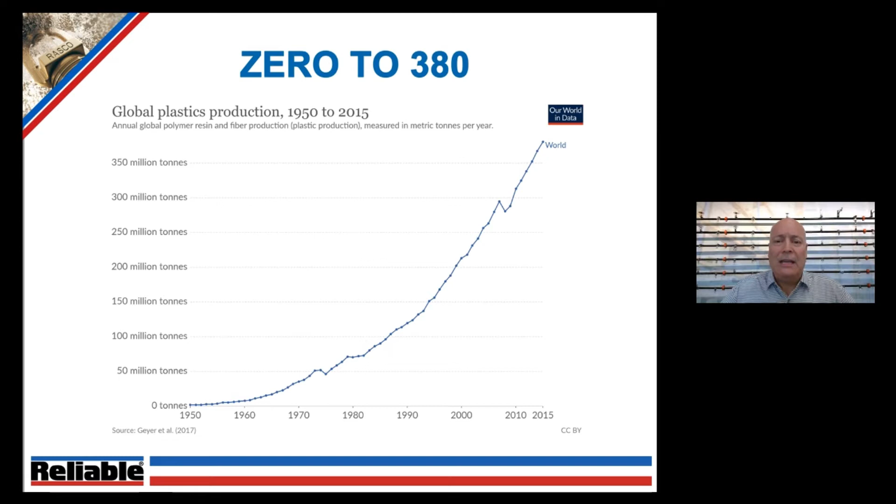The first synthetic plastics were developed as early as 1907, called Bakelite. But it wasn't until 1950 or so when we really saw plastics take off in the world. You can see on the chart here, 0 to 380 million metric tons of plastic between 1950 and modern day. To put that in perspective, if you took two-thirds of the world's population and put them on a scale, you would have roughly 380 million metric tons. So the prominence of plastics in the world today, as everyone knows, is going to be driving a lot of our discussion moving forward.

Up until recently, there's been something missing in the standards. We've had protection schemes for class 1 through 4 and Group A plastics for a number of years, going all the way back to the NFPA 231 and 231C days. Those documents were blended in with NFPA 13 in 1999. There had been protection schemes for Group A plastics with some exceptions, that exception primarily being the protection of exposed expanded plastics.

We did have protection schemes for small limited heights, 5-foot heights, found in the miscellaneous storage section. But the full-on storage of exposed expanded plastics has been missing.

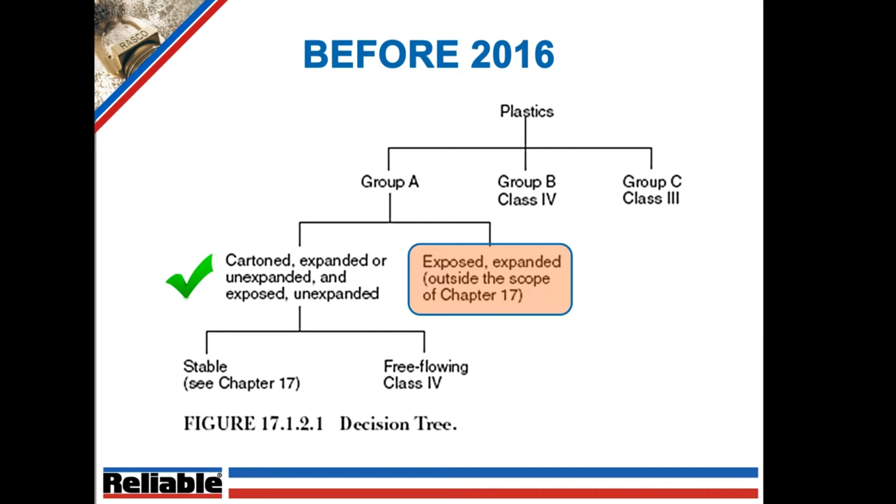Before 2016, this is what the decision tree looked like. You worked your way down, and as you can see there on the left with the green check mark, cartoned expanded or unexpanded and exposed unexpanded - we had protection schemes in NFPA 13, but we did not have protection schemes for the high piled storage of exposed expanded. Those were simply outside the scope.

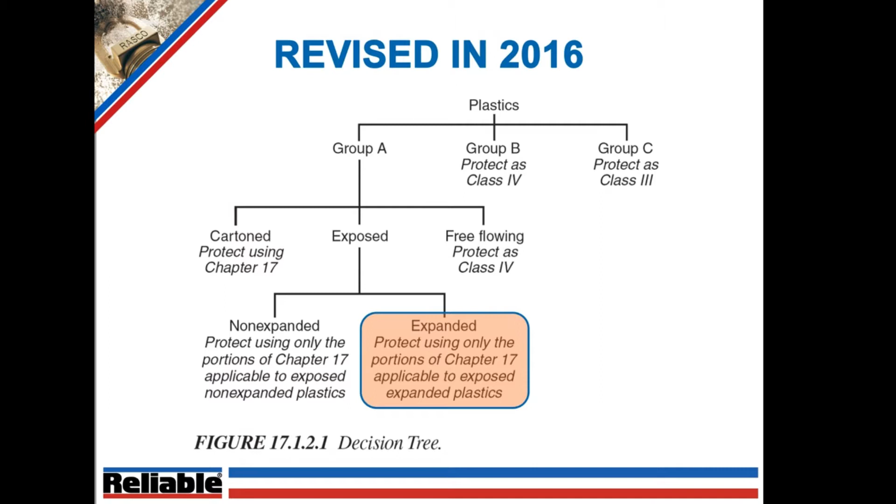In the 2016 edition, however, we did get some direction, and that direction now shows up on the decision tree: expanded plastics protect only using the portions of Chapter 17 applicable to the exposed expanded plastics. What exactly was that? That was an effort undertaken by the Fire Protection Research Foundation, the research wing of NFPA. They essentially did some testing and validated a scheme that would allow the protection of exposed expanded plastics over 25 feet, as well as obviously under 25 feet.

The test parameters were 35-foot storage in a 40-foot building, 8-foot aisles. The interesting aspect of the scheme was the use of vertical barriers. The vertical barrier was installed at every other rack upright, about 16 feet apart. There were some constraints put on the area, 124 square feet, K25 sprinklers at the roof, 12 sprinklers at 60 psi - so large bore sprinklers flowing at high pressure.

Again, remember this is ceiling only. The idea here was to create essentially a chimney to take the heat from the fire directly to the roof as quickly as possible, activate those fire sprinklers as quick as possible, and then force that fire back down in that same chimney or chute, if you will. 12 sprinklers at 60 psi, however, 2,600 gallons per minute. So yes, do we have something that's feasible? We do. Do we have something that uses a lot of water and large piping and fire pumps and things like that? Absolutely. So that was one option that came in 2016 in Chapter 17.

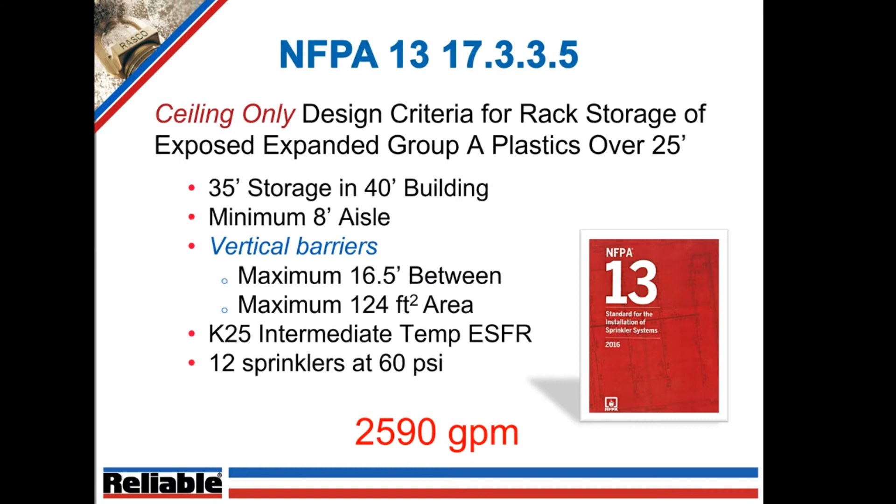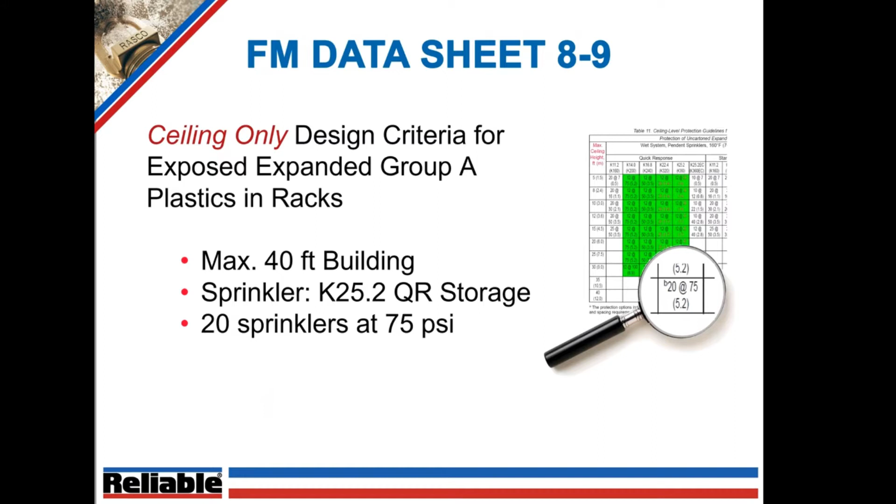Factory Mutual data sheet 8-9 also has a ceiling-only design criteria for exposed expanded plastics. Again, 40-foot high building, K25 storage sprinklers, quick response storage sprinklers, an expanded area of 20 sprinklers flowing at 75 psi. No barriers, which would explain the expanded area, and again higher pressure by 15 psi. Do the math on that one, you're going to end up almost 5,000 gallons per minute.

So again, feasible, large pumps, large storage tanks if you have them, and large piping to go along with it.

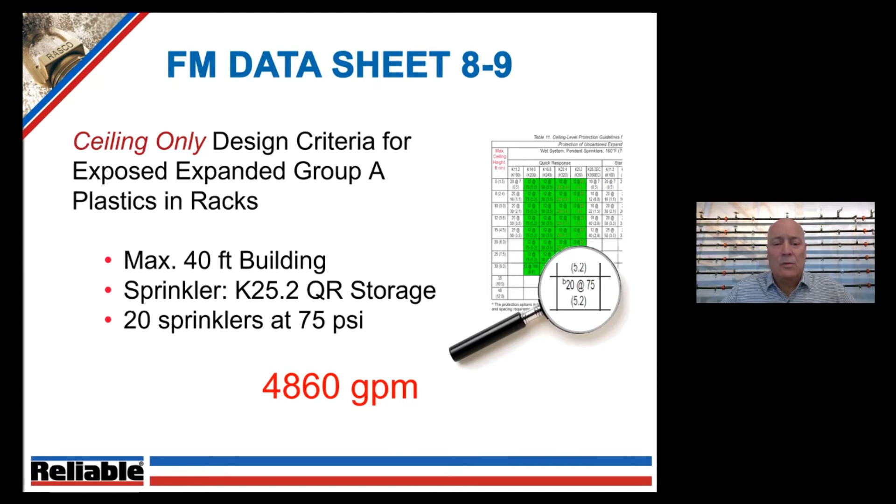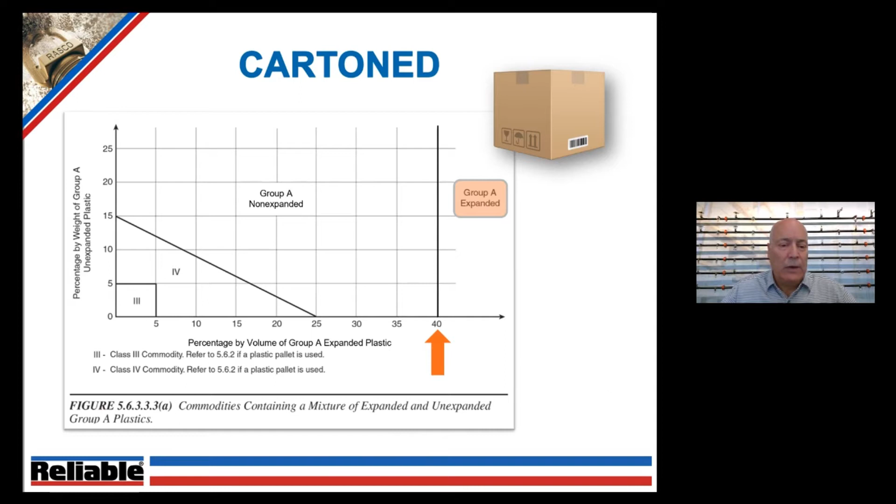What we're going to do is take a look at the percentage of exposed expanded plastics by volume, and draw a line at the 40% mark. If it's more than 40%, we protect that as a Group A expanded plastic. To the left of the 40% mark, we work our way down into a Group A non-expanded protection scheme, and then depending on weight and volume, down into Class 4 and even Class 3 for small amounts of each of those components.

If the commodity is not cartoned and is on the racks exposed, that 40% mark drops down to 25%. We're then going to have a protection scheme that protects the entire area as a Group A expanded plastic exposed. And again, less than that, we work our way down to the Group A non-expanded exposed, and then Class 4, Class 3 as you work your way down.

So again, some guidance provided in 2016 on how to do some of these protection schemes.

Also, what we got in 2016 was a protection scheme for isolated commodities—I've used a real technical term there, localized stuff in racks. This is for a higher class commodity in limited amounts that can be isolated to a section or portion of the rack. These protection schemes will involve either an extended coverage area beyond the square footage of the protected commodity, or vertical barriers and perhaps a horizontal barrier with sprinklers enclosed within those.

We saw some things like this in the big box stores with the storage of paints and paint thinners in local hardware stores. We still see things like this happening, but now it's been standardized in NFPA 13.

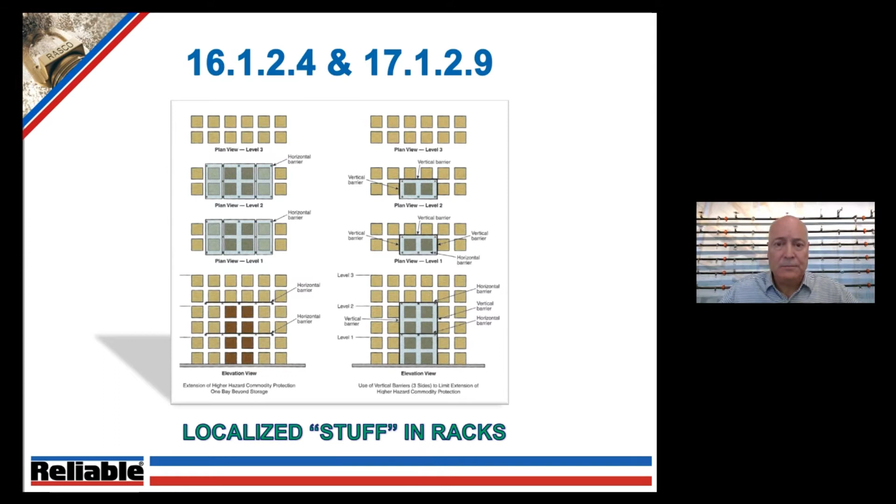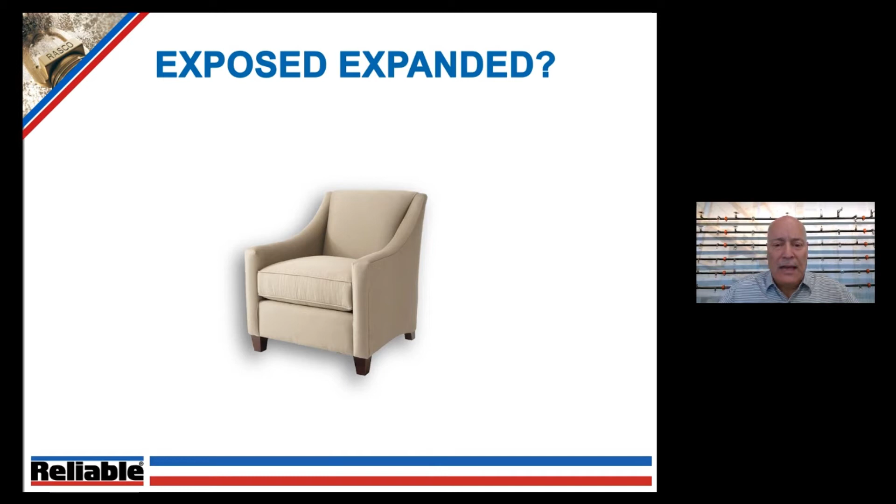So we worry about exposed expanded plastics. What actually are those? We need to be careful here. You can look at the chair on the screen and definitely understand that's some type of exposed expanded plastic within that chair. However, there are other things that we don't necessarily look at and recognize as an exposed expanded plastic.

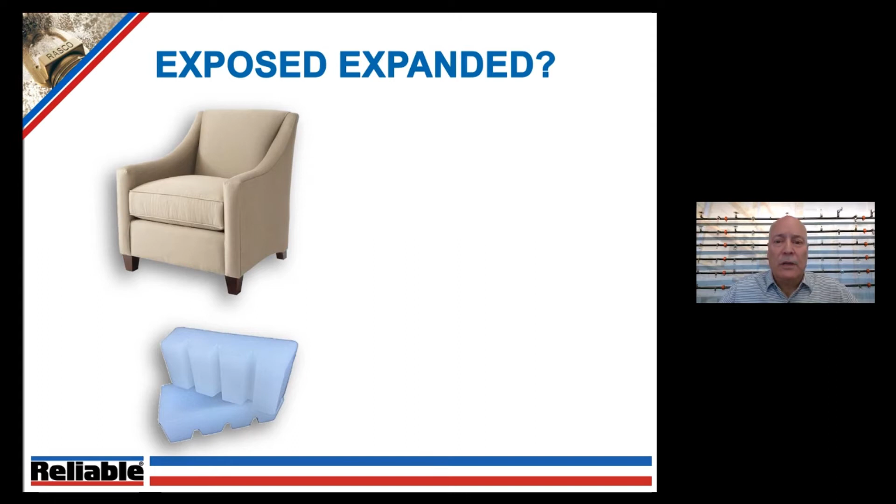Paraffin blocks are an example of exposed expanded plastics. It's not squishy, you're not going to put your hands on it and squeeze it, but the characteristics of how it burns are similar to those of an exposed chair that you see there.

Car bumpers: the hard plastic on the front of these is definitely not exposed, but what's right behind there is going to be fairly substantial amounts of almost like a dense styrofoam material that creates that shock absorption capability. So that blend of commodities, when you set that on a rack, needs to be treated as an exposed expanded plastic for that reason.

And then finally, charcoal briquettes that are impregnated with lighter fluid. Charcoal briquettes by themselves are going to be a little bit less of a hazard. However, when you impregnate them and they catch fire, they're going to burn similarly to the exposed expanded chair that you see there as well.

So it's very important, as always, to make sure the commodity is classified properly, hopefully by the owner and/or the insurance company. Make sure everyone's in agreement on exactly what we are protecting, and we need to move forward from there.

A question we've used in some of our presentations over the years: we've spent the last 30 years trying to eliminate in-rack sprinklers. We all know the pitfalls of having sprinklers in racks. Since the early 80s, mid-1980s, with the advent of originally large drop sprinklers and then ESFR sprinklers, the whole thrust was to somehow get rid of the in-rack sprinklers to prevent water damage. So we spent the last 30 years trying to do that.

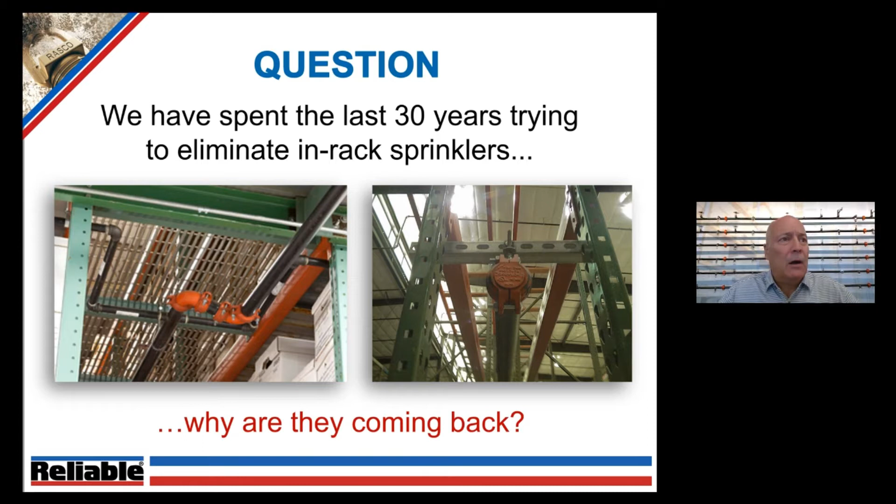Why are they coming back? We talked a little bit about it, right—the advent and the more higher prominence of plastics being stored in our warehouses.

Another feature there is higher buildings and automated storage and retrieval systems. With higher buildings, obviously there's more fuel load as you move vertically, more time for the fire to reach the ceiling, and then the challenge of trying to push the energy of that fire back down to control it.

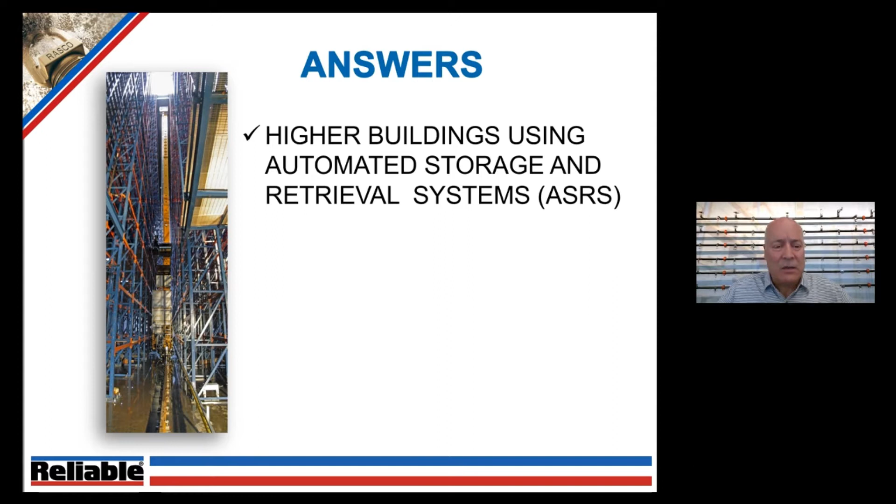The other thing that happens with automated storage and retrieval systems is the computer's ability to find an empty pallet position for any commodity it needs to place. Back in the day, you would isolate your worst commodity to a designated section of racks and do spot treatment, either in-rack protection or higher density sprinklers. But now that the automated storage and retrieval system can put that commodity virtually anywhere in the warehouse, we need to protect the entire warehouse to the highest hazard classification. That's something that's happened over the past few years.

And again, more exposed plastic storage. So we talk about the future of storage, what does that look like? Buildings in excess of 100 feet high, that might be storing car tires for instance. Imagine that bombshell sitting there waiting to go off.

Here's a quick picture of what these things may look like: some distribution, incoming and outgoing products, low storage area - we say low, but that could be 35, 40, 45 feet - and then the interior portion with very, very tall 100 foot high or higher roofs. Oftentimes these are rack-supported buildings.

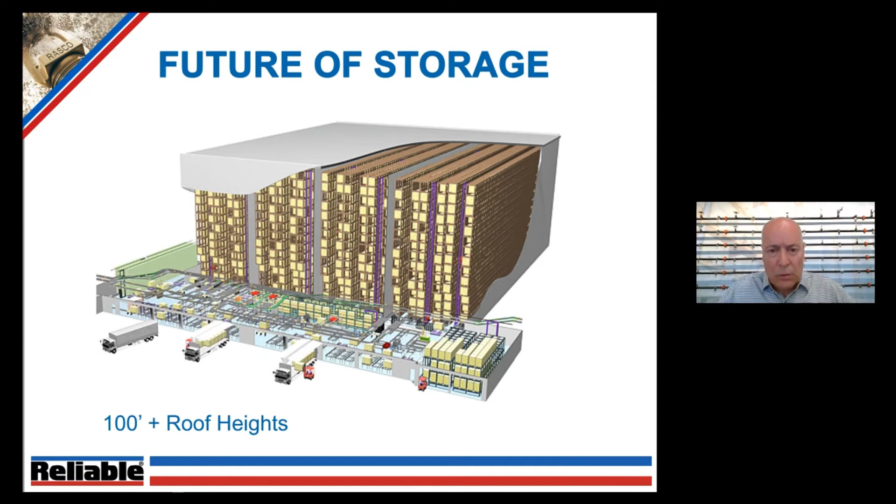So we say the future of storage, however, I had the great pleasure of working on a project in Tacoma, Washington back in 2007, and it was a rack storage building - so not the future. Now 13 years ago, these type of buildings were being built. I'd like to give credit to my former employer, you know who you are if any of you are listening, for the use of these photos and drawings as part of this presentation. So it's not really the future, it's happening now.

This building was protected - about a 110-foot tall building, 150,000 square foot footprint underneath it. Around 18,000 in-rack sprinklers went into this building. If you look at the picture on the right, about a third of the way down from the top, looking through those racks, is the cab of a semi-truck. That'll give you some perspective on the magnitude of these size buildings.

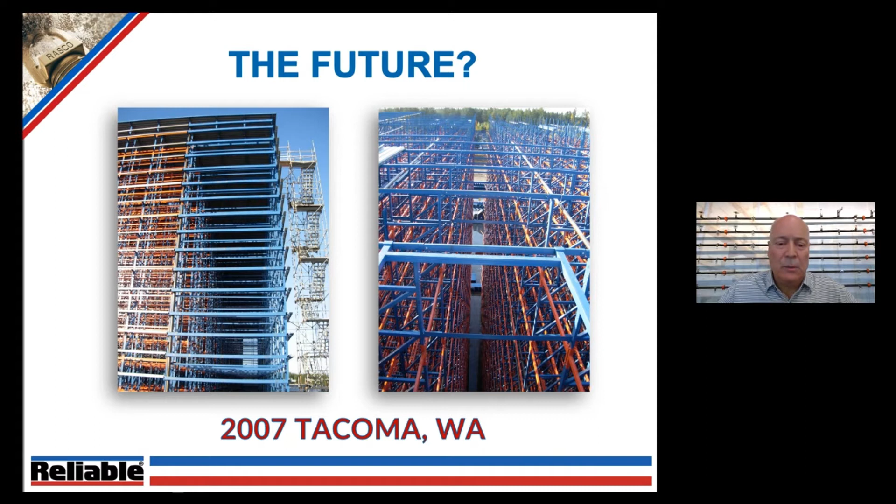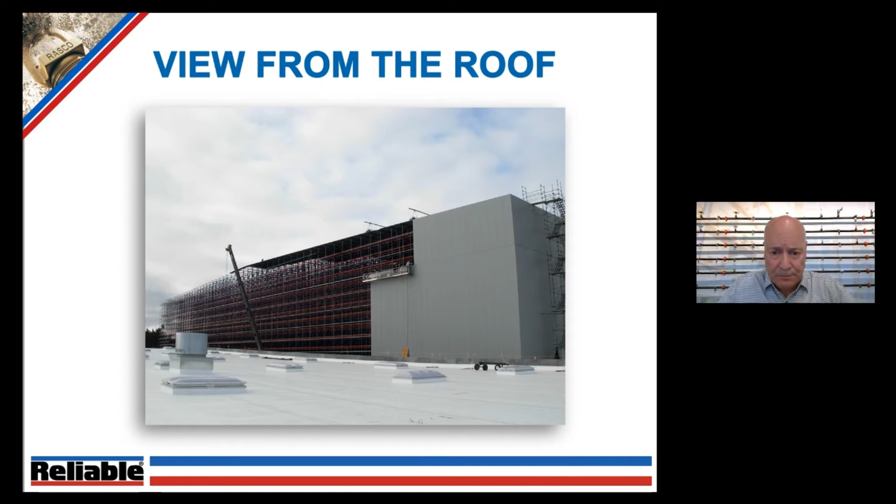I call this the view from the roof. I got to the top of the distribution area, the receiving area - I don't remember which one it was. So right there, I'm standing 40 or 45 feet off the ground on the roof of the low portion. Again, just to give you an idea of the magnitude of these buildings and the way they're designed. Very, very interesting project. So what's new?

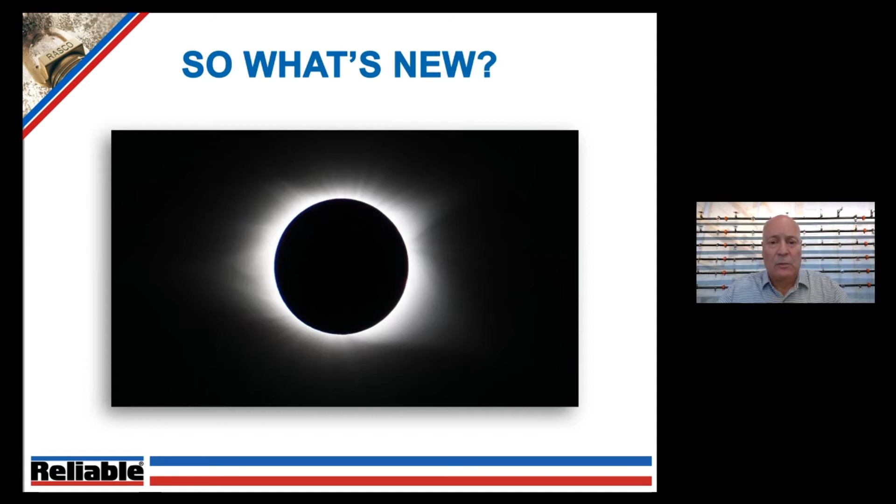It's kind of similar to what's happened in the last couple years with the protection of exposed expanded plastics, and some of the options we're going to talk about today. You're going to hear a lot of talk, and you've probably been hearing a lot of talk over the last several years, with regard to what we call the virtual floor. What is the virtual floor? In some cases, it's a combination of sprinklers and a horizontal barrier. In other cases, it may simply be a layer of sprinklers so dense that the fire simply cannot get past it, creating a vertical separation as you move your way up through the racks.

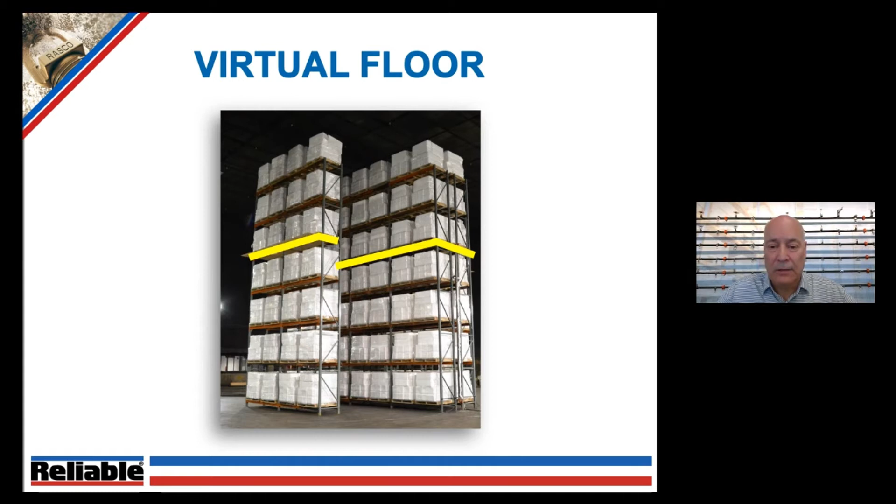The idea is that when things are validated properly, the fire will be contained within the vertical separations, be it horizontal barriers or that dense application of sprinklers, referred to as the virtual floor.

Now, what is the nice thing about the virtual floor? Steve mentioned it early on. With the options we're going to look at, we do not have to add or balance the in-rack demand to the roof demand. I've got a picture of Mr. Miyagi from The Karate Kid - remember, that whole movie was about balance. Life is all about balance here. So when we talk about in-rack sprinkler protection, we don't have to balance that anymore.

If anybody's been in the business a while and designed one of these in-rack systems conventionally before the ones we're going to talk about, we would run through our hydraulic calculations, and maybe it calculated out at 400 or 500 gallons per minute, whatever the demand was. Where that connected to the common supply pipe feeding the rest of the building, that demand had to be brought in within half a PSI. The pipe needed to be sized - oftentimes we're doing crazy things like running very small pipe to a lot of sprinklers. It seemed kind of silly, but the idea was to bring those pressures within half a pound, do a quick K-factor balance, and then take that total demand, ceiling demand and rack demand, back through the common piping, the backflow preventers, the fire pumps, the underground mains, and everything that fed that system.

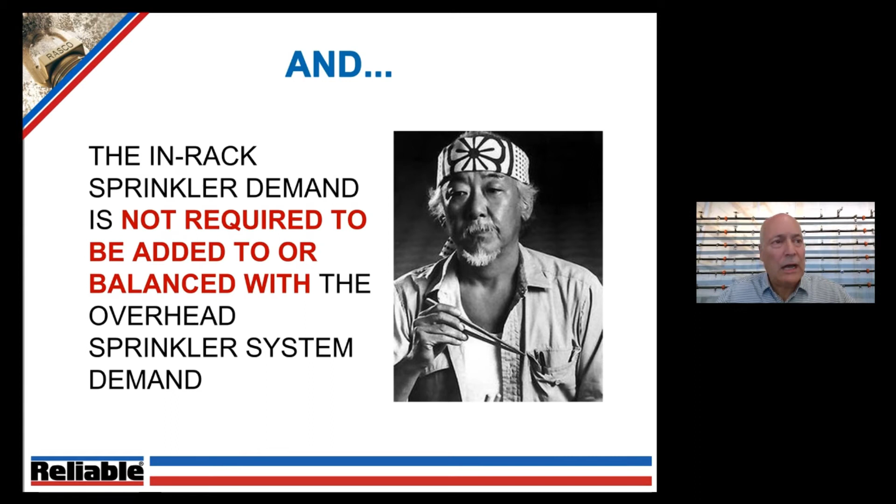So when we do that, that's going to drive pipe sizes up, fire pump sizes up, water tank sizes up - not just the material, you're going to have labor associated with that as well. So the beauty of these systems is we do not add or balance them to the overhead sprinkler system.

What has that got us right now? In 2019, in the new 2019 edition of NFPA 13, we have options - door number 1, door number 2, or door number 3. Let's take a quick look at what those options are.

25.8.1, option 1, as it's going to be listed in the standard, covers everything - class 1 through 4 and all group A plastics, whether cartoned or exposed on the racks. If you've had experience with FM scheme 8-9A, this is kind of what we're talking about here.

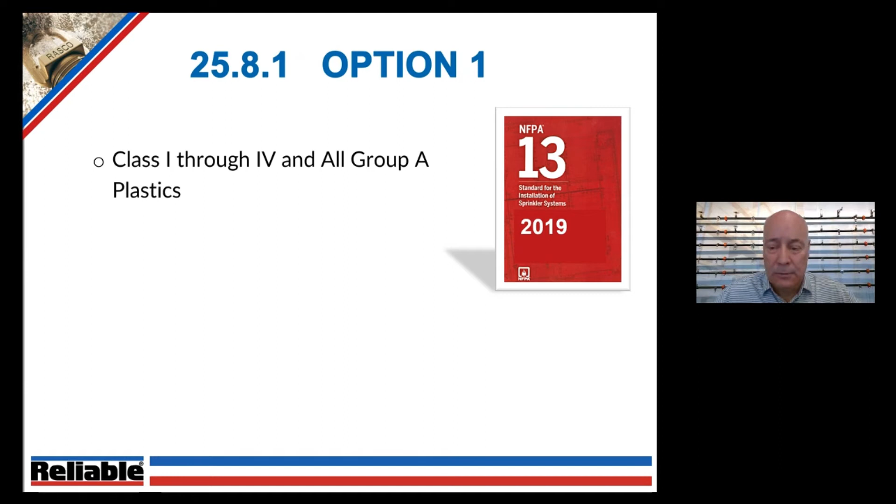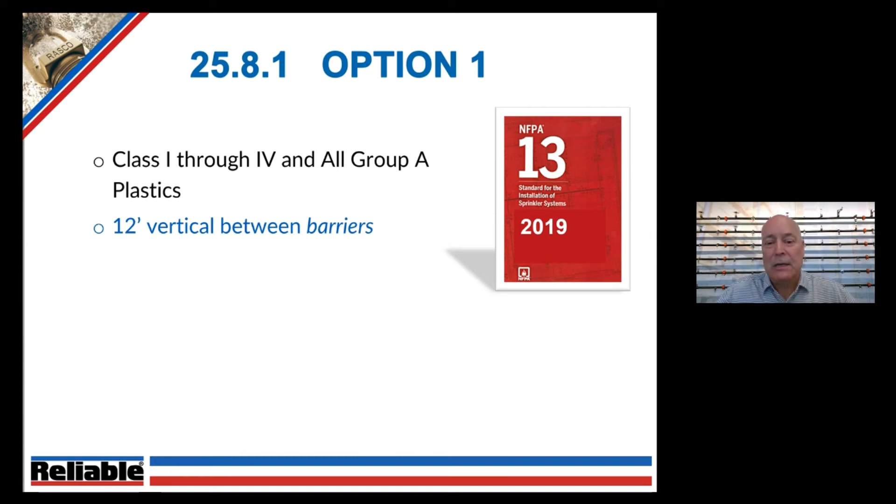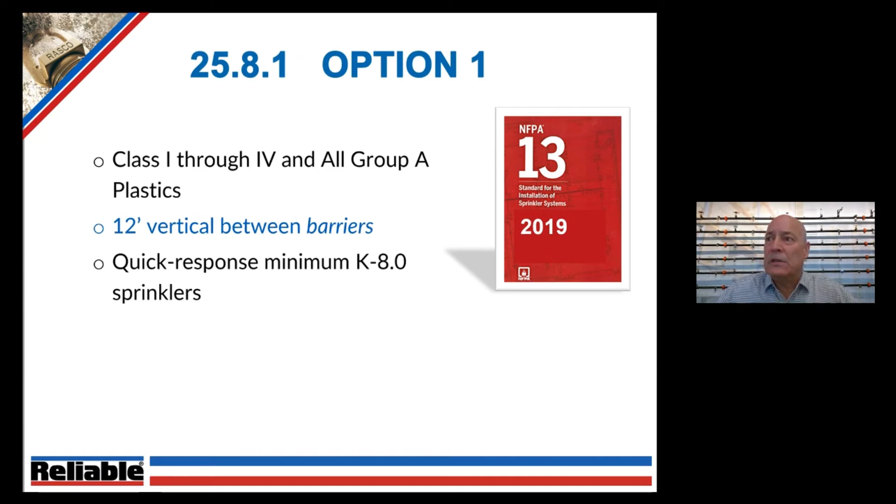12 feet vertically between barriers. So if we have a 120 foot tall building, we're going to have 9 or 10 vertical or horizontal barriers with in-rack sprinklers below them. We're going to use quick response minimum 8.0K sprinklers, so again we may look at an 11.2 or something like that to save a little bit of pressure.

Sprinkler deflector as close to the underside of the barrier as possible. NFPA 13 is going to give us some diagrams that we're all kind of used to seeing on what these protection schemes look like for the various types of racks.

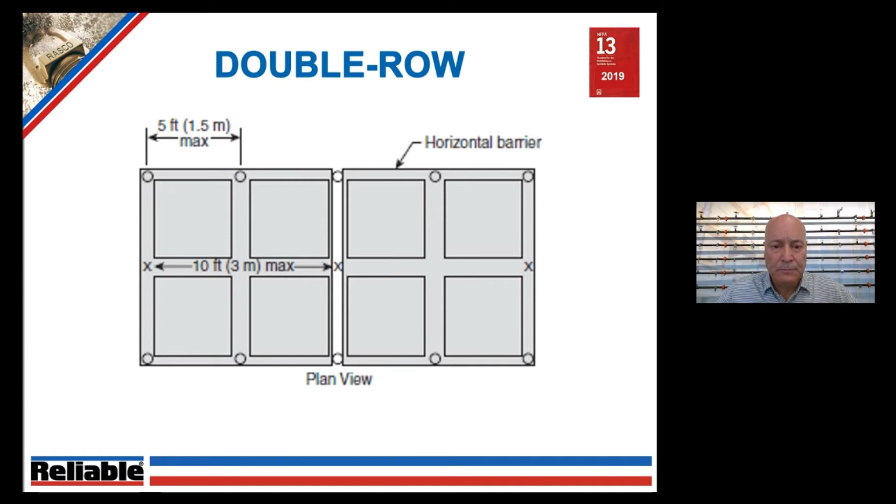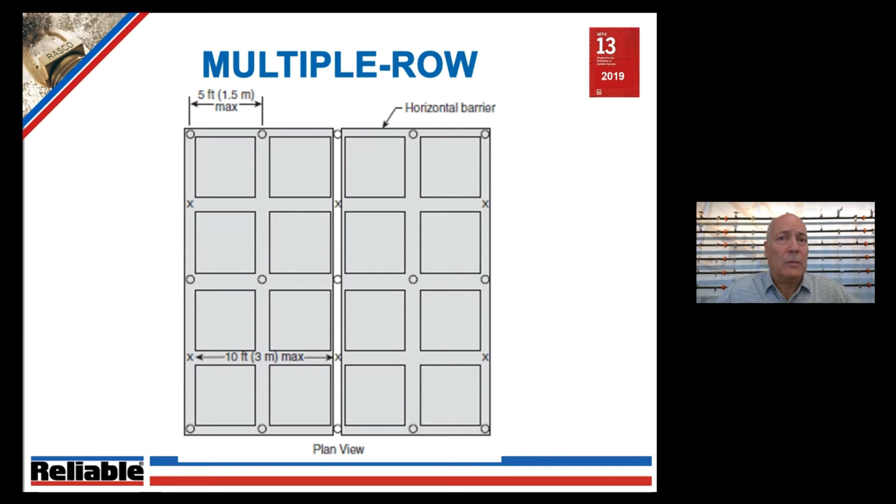Multiple row racks become kind of a permutation of the double row racks - face sprinklers and then alternating longitudinal flue spaces, either 10 feet or 5 feet on center. So again, a relatively dense application of conventional, I'd say small bore or smaller bore fire sprinklers with those horizontal barriers, 12 feet on center. You have a pretty flexible system that will protect virtually anything that wants to go in there.

What does the water demand look like? I want to take a second and let you know what we're going to see at the end of the presentation. I'm attempting to build a comparison between options 1, 2, and 3 and put them into a mock building, so we can see how many fire sprinklers are needed in that same size building. Hopefully this will become clear in a little bit. This is all based on the project I worked on in Tacoma that we saw earlier. So what do we do for water demand for option number 1?

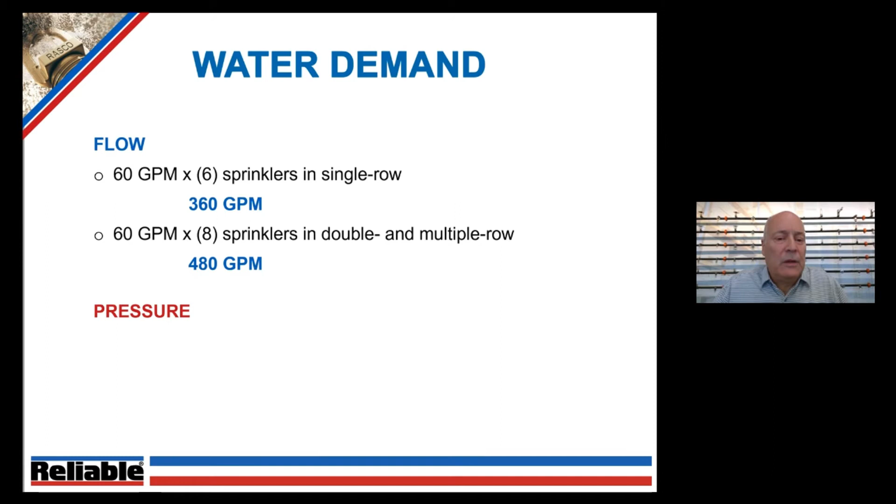60 gallons per minute times 6 sprinklers in a single row, 60 gallons per minute times 8 sprinklers in double and multiple row. Pretty straightforward information provided there.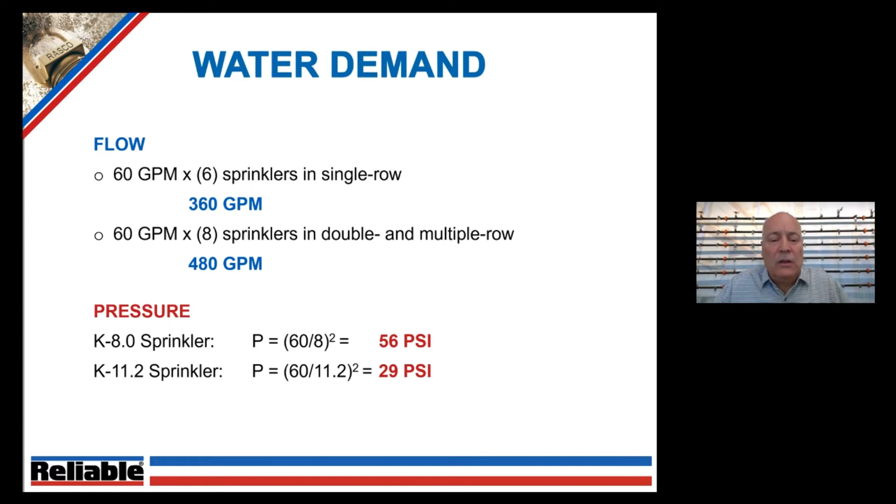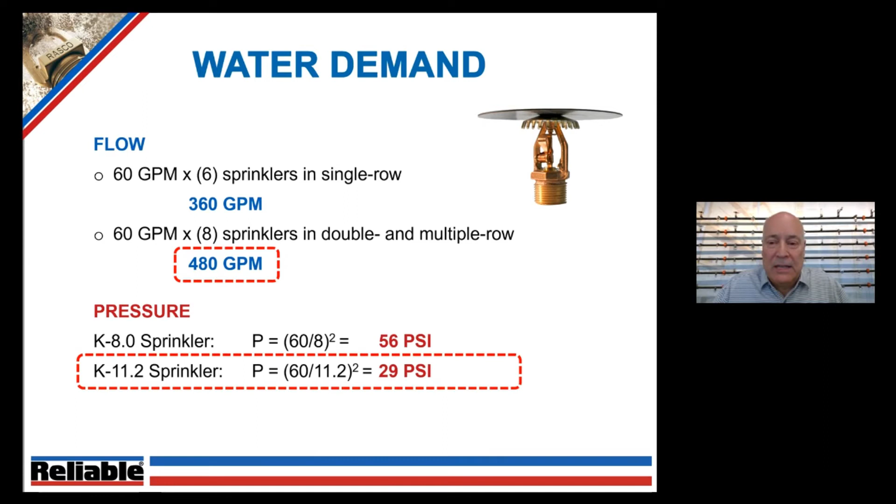If we look at the pressure, then work our formula, Q equals K times the square root, reformat it and figure the pressures out, we can see that the 8.0 K sprinkler is going to take 56 PSI. That may be a little bit problematic. So in this case, we might look at the 11.2 K sprinkler. I'm going to choose that because this is the build that I'm working on to make the comparison at the end here. So keep these numbers in mind, and we'll see them at the end of the presentation.

25.8.2 option 2 is also brought to us courtesy of FM. It covers a couple of different things here. We got to now start breaking this down a little bit.

For class 1 through 4 and cartoned non-expanded group A, we're now going to jump that 12-foot spacing up to a maximum of 40 foot between sprinkler levels. And if we have cartoned, expanded, and all exposed plastics, we're going to drop that back down to 30 feet. And again, this is all the result of testing that's been done in the real world.

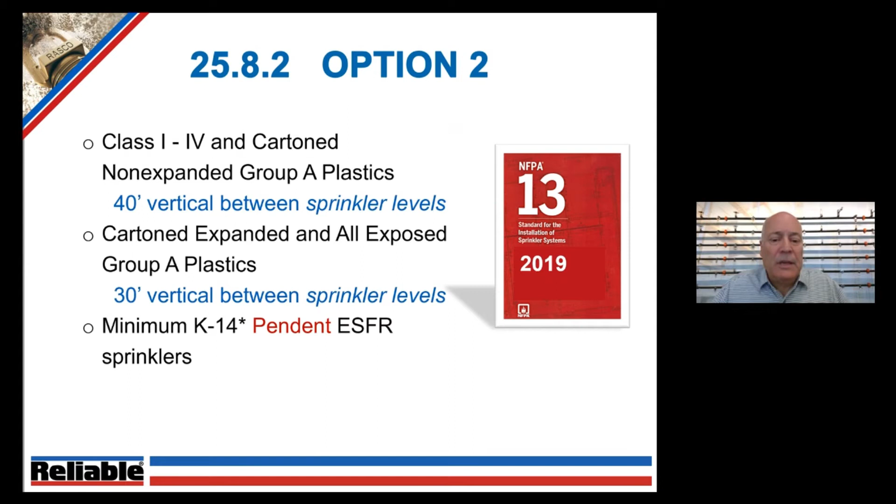Minimum K14 pendant ESFR sprinklers, pendant being an important part there. Minimum K14 with a condition - we'll see, again, we're going to have some options and some requirements to go larger, but K14 would be the absolute minimum, and then a minimum of 6 inches top of storage to the deflector.

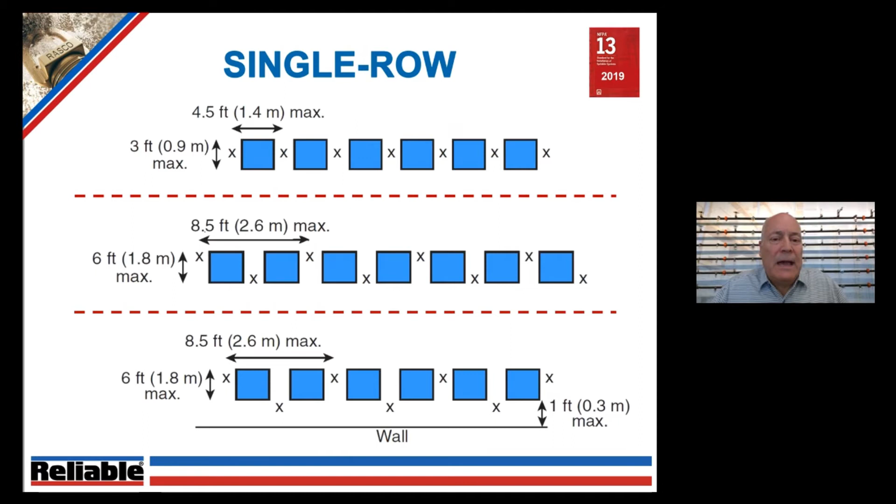Again, we're going to look at our diagrams to understand the spacing. For a 3-foot maximum depth single row rack, we're going to go right over the top of the pallets, 4.5 foot on center maximum. So again, every pallet position.

If the depth of the single row rack goes up to 6 feet, we need to do a stagger front to back across the single row rack. And as anyone that's designed and installed knows, when we start getting into staggers and things like that, our complexity of our design, our installation, our fabrication has just gone up proportionally.

And then again, we can see a single row rack against the wall. We're allowed to move that staggered sprinkler back into the space between the wall and the back of the rack.

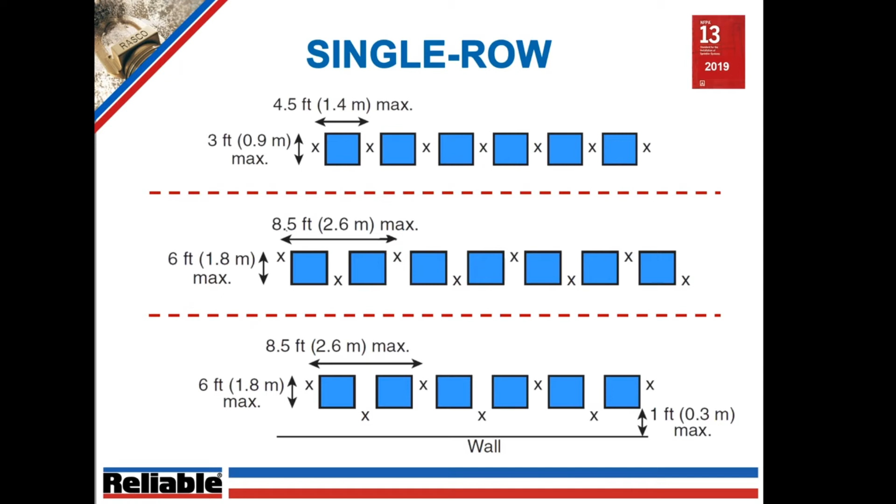The reality is that if you do have cold solder, you're not necessarily needing to have water discharged out of that sprinkler. If the fire gets hot enough, it potentially could set that sprinkler off, and it will come into action if it's required to. But again, we're not worried about cold solder in this condition, nor are we worried about the minimum 8-foot spacing for ESFR sprinklers.

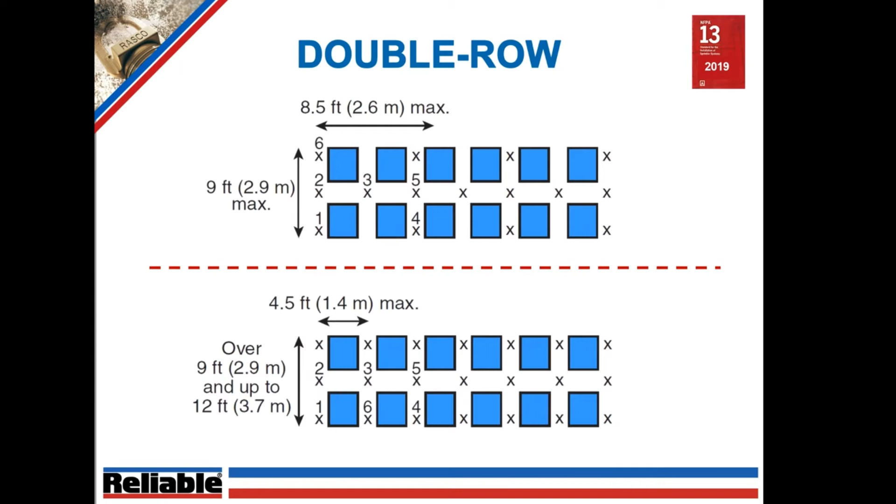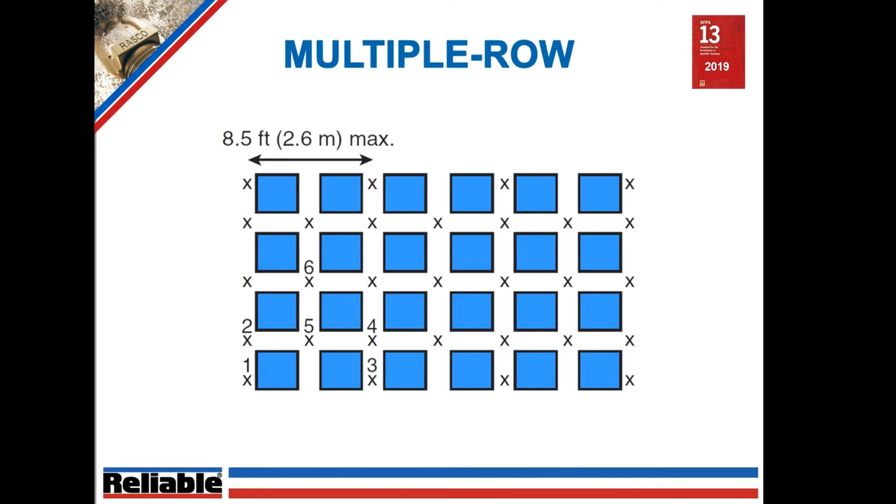And then the numbers that you see on there, you're given some guidance on which sprinklers to calculate when you do your hydraulic calculations. So again, we have a chart now provided for the number of sprinklers to calculate.

These numbers may be changing in the next edition, but not by much. One thing to keep in mind in the next edition of NFPA 13, which will be 2022, it's very likely that all 3 of these options are going to be brought together into one chapter.

So this is going to get even a little bit more simpler to understand. You'll see this change being brought forth if it passes in the 2022 edition.

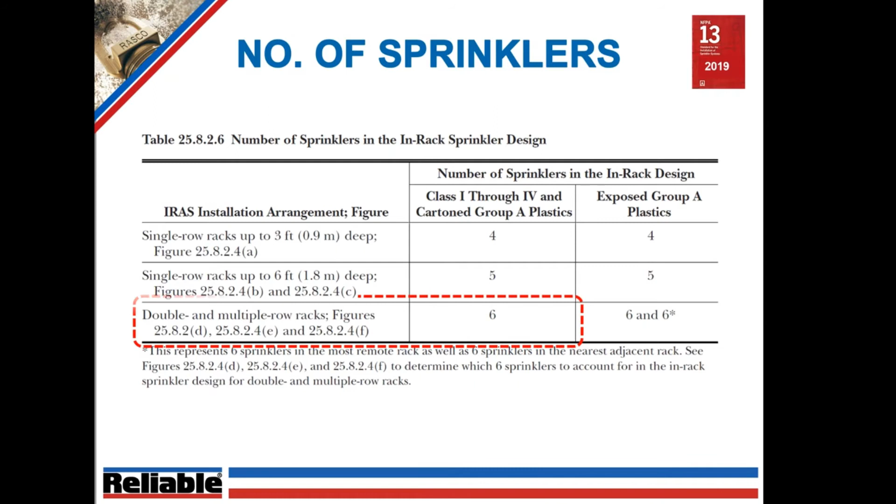So we're going to take a look at double and multiple row racks. This is kind of what we're going to build our comparison around. Here are our flow rates provided by the standard for the 30-foot and 40-foot spacing. You can see at the 30-foot spacing, a minimum K14 for the lowest hazard commodity, and then for the 40-foot spacing, a minimum K factor of 22.4. You're going to get the gallons per minute associated with each of those.

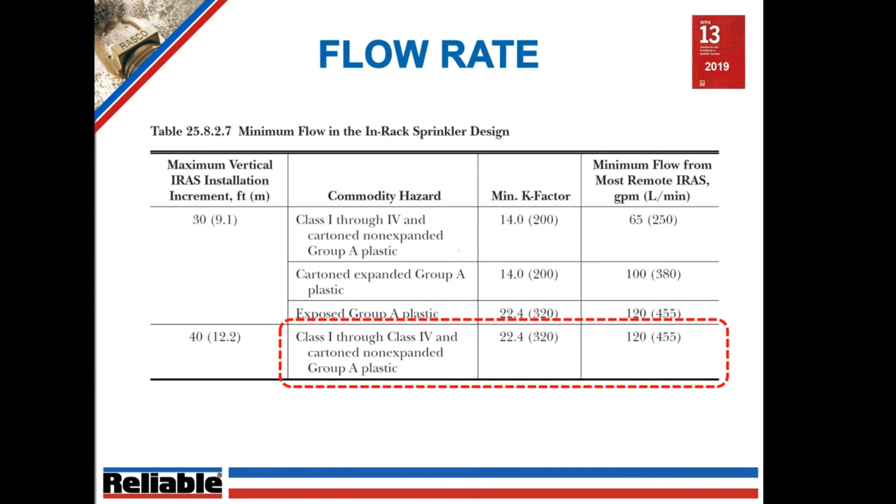So we're going to take a look at class 1 through 4 carton non-expanded. We're going to look at the water demand as an example. Again, these are not singular - there are many, many options to work your way through. We're simply building hopefully a comparison.

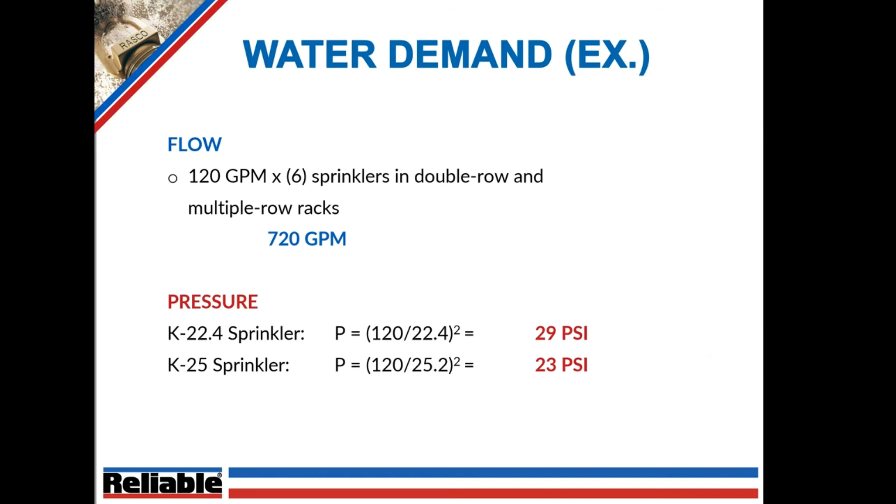120 gallons per minute times 6 sprinklers in double and multiple row equates to 720 gallons per minute. In this case, since we don't have a lot of difference between our pressures, and because we had 29 psi in the last one, I'm going to select that as the option.

One of the things you're going to see from manufacturers is the provision for guards and shields now for either the standard spray sprinklers, and actually the ESFR sprinklers as well. So we'll have the ability to use those listed for in-rack use only, not for use at the ceiling or under obstructions.

25.8.3, option 3. Before we talk about that, we're going to take a little Rocky Horror Picture Show time warp back in time. We're going to go back to 2012 at Reliable Automatic Sprinkler Company.

The goal in 2012 started with an idea to provide protection schemes for storage arrangements currently beyond the scope of NFPA 13. They simply did not exist. We knew they were out there, we knew they were being built, but there was no protection scheme standardized anywhere. So the idea here was to look at coming up with a scheme to protect those.

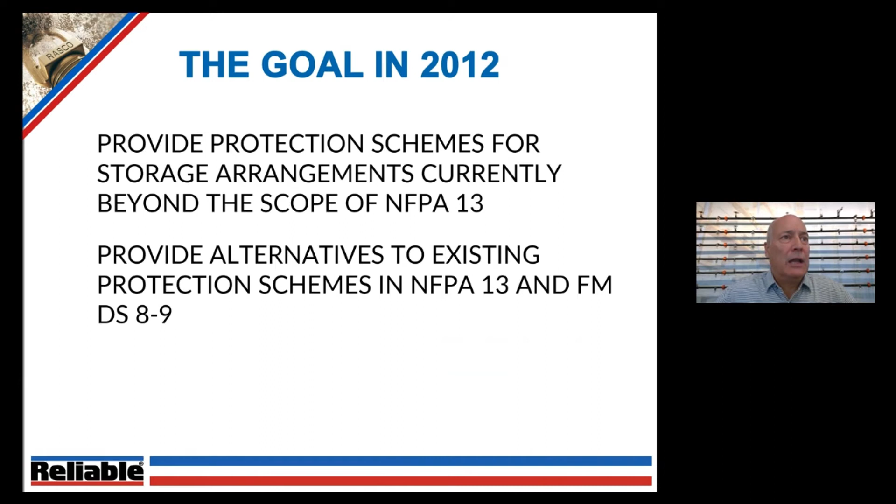Where there were schemes for the protection of class 1 through 4 and non-expanded plastics, either provided by NFPA 13 or Factory Mutual, were there alternatives that had not been proposed or validated? But the overriding goal here was to do all of this and come up with an overall lower water demand.

Remember the two schemes, the 2,500 gallons per minute roughly and the 5,000 gallon per minute schemes for protection of exposed expanded plastics. Is there a way to do that with lower overall water demand, to reduce the size of the pipe, reduce the size of the backflow preventers and the fire pumps and the underground mains and the water storage tanks if they were needed, and the associated labor that comes along with those?

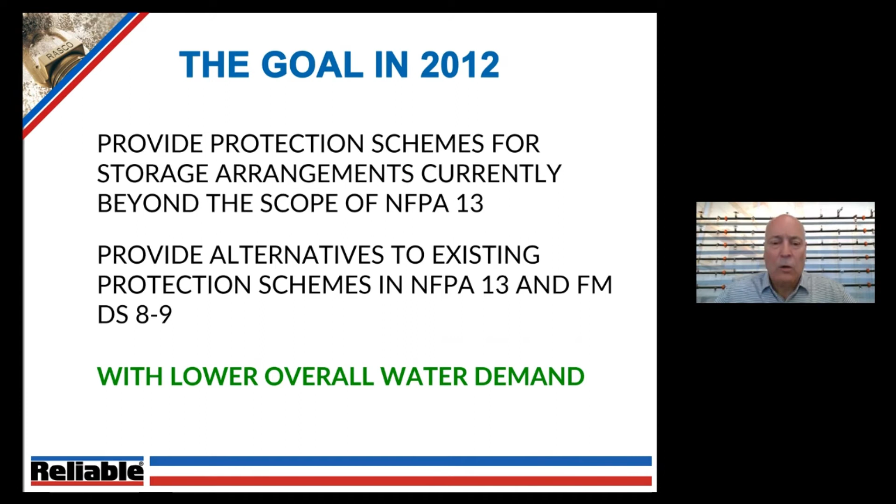So those were the goals back in 2012. To date, Reliable has run 8 tests. Had the first one failed, we may not be sitting here today, but the first one went very well, as we'll see here in a little bit.

So 8 tests given different commodity classifications and storage heights and different variations to try and validate some design parameters for the industry. The big idea, and we say big idea in terms of the K factor.

25.2 K factor sprinklers in racks, kind of unheard of. If you're going to break a fire sprinkler off with the forklift, you would probably like to break off a 1/2-inch fire sprinkler, I suspect. Now we're talking about putting large K factor sprinklers in there. Obviously the water demand, the water flow out of those is going to be much higher. What's the flip side? Hopefully there are going to be far fewer of them as targets for the forklift operator.

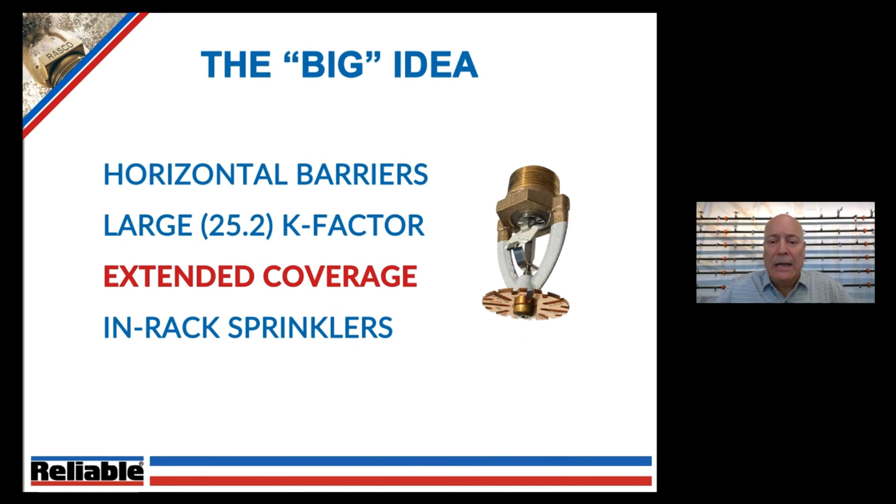What was the other idea? The other idea was the use of horizontal barriers, a scheme that had been somewhat validated by Factory Mutual with their 8-9, as well as extended coverage. So again, not just a big bore, but extended coverage, and we'll see why that idea was important here in just a bit. The end result of this became known as the Reliable N-RACK-EC, Extended Coverage In-Rack Sprinkler System.

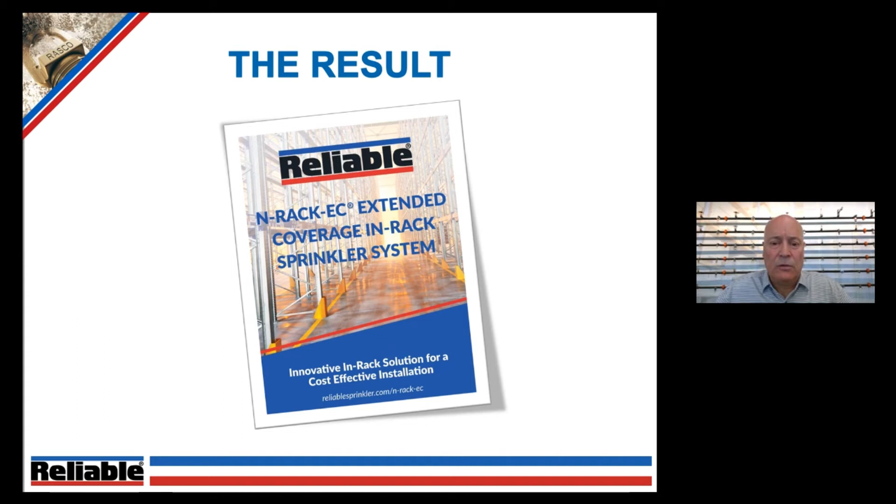Information about that system is available on the website or by contacting technical services or your local sales rep. So why the N-RACK-EC? If you are at all familiar with the use of combustible concealed space sprinklers in shallow areas 36 inches and less, this concept will come right to mind.

The reason we are required now, and have been for several years, to do that in combustible concealed spaces is because the standard umbrella pattern of a standard spray sprinkler does not open wide enough before it hits the flat surface below it. So we needed fire sprinklers, all the manufacturers have them, with a flat spray pattern trajectory that allows that pattern to open in those very shallow spaces.

Now take that concept above the pallets in these racks. When we put standard spray sprinklers in there, we have the same result: the umbrella pattern simply does not open, and we don't get the water out to where we need to. The flat spray pattern trajectory of the EC sprinkler allows that water to eject from the shallow space between the load beams and the top of the commodity, and in a lot of cases actually penetrate into the target arrays on either side. We're going to see a demonstration of that in a video here in just a second.

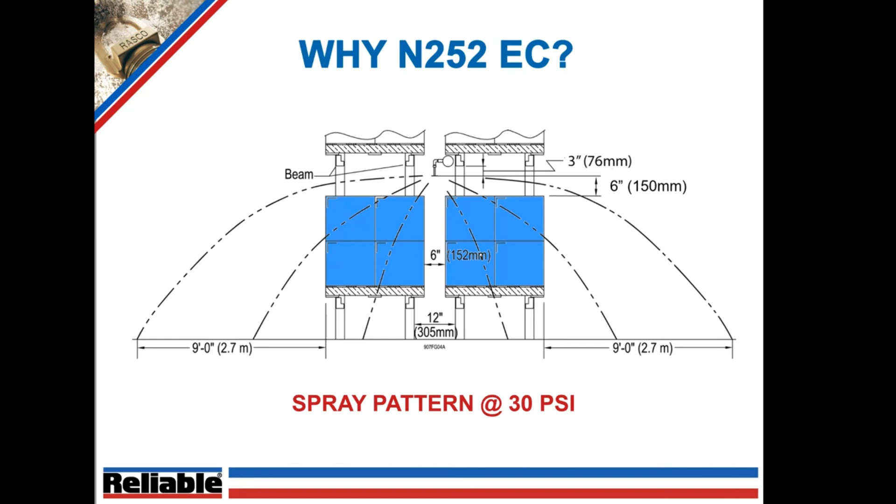The horizontal barriers, what do those look like? 3/8 plywood or better. The horizontal barrier is not there to not burn. It is simply there to capture heat and aid in the activation of the fire sprinklers. You can see in this case we're allowed the 3 or 3.5 inch gap, I don't remember exactly which one it is, but a small gap at the rack uprights to facilitate ease in setting those barriers into place.

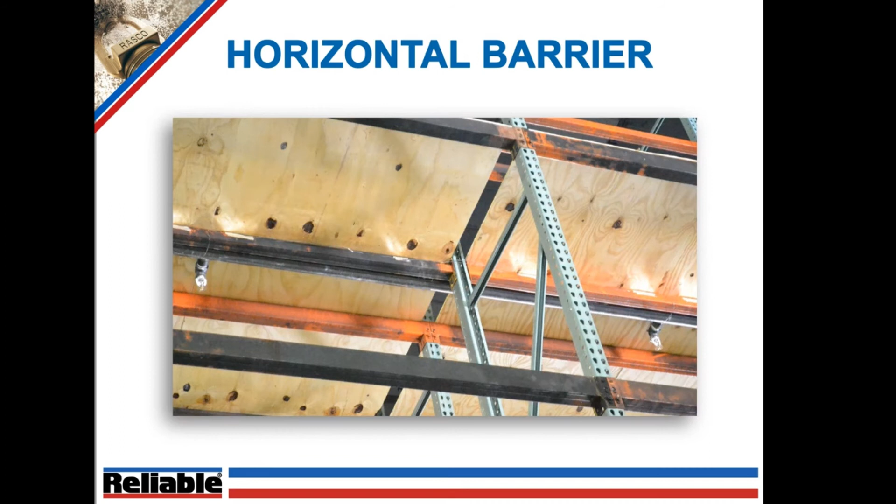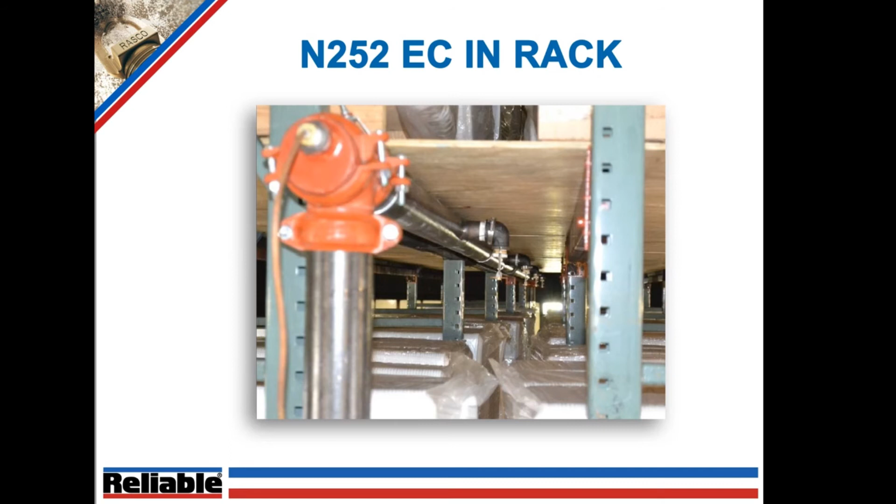What does the piping look like? Very conventional down the longitudinal flue space. In the case of the testing, the fire sprinklers were broke off to the side and then elbowed down. That was to save some deflector height as opposed to an outlet right in the bottom of the pipe. The pipe's going to be generally a little bit larger depending on your pressures and your hydraulics. In this case, I think that was either 2.5 or 3 inch pipe running down the flue space. But the layout is very similar to what we would do years ago with maybe smaller pipe and smaller fire sprinklers.

So what did the test parameters look like? Again, at the time we were trying to match the best information available in the marketplace. In this case, for the cartoned unexpanded, it was 43 feet of storage in a 48-foot building. We installed a horizontal barrier at the 30-foot level. We pulled the aisles within 4 feet to save some space and make use of the building a little bit more attractive to the owner. And we used EC pendant sprinklers at the roof.

We're going to show you a video of the test right now, and I'll do some narration. If everything works, the sound should be off on the video. Last time we did this we had a little bandwidth issue, but we'll see what happens here. We're going to get the video started.

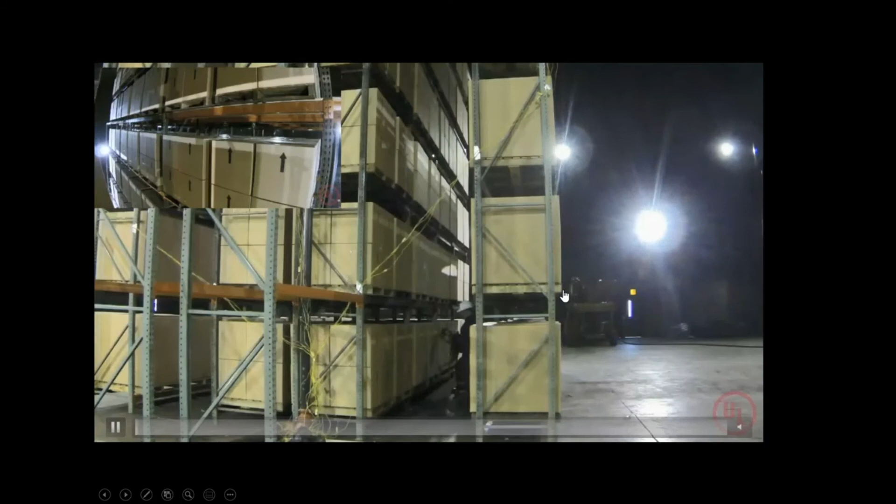In the upper left is a GoPro camera that's looking at the underside of the horizontal barrier, and we're going to watch the video here. It's about a 2-minute video.

As the joke goes, these are the professional arsonists at UL.

Again, cartoned, unexpanded plastics, 43-foot high, 48-foot building. The horizontal barrier in the upper left GoPro view is at 30 feet. At around the 30-second mark, you're going to see some smoke wisping out of the flue space on the underside of the barrier.

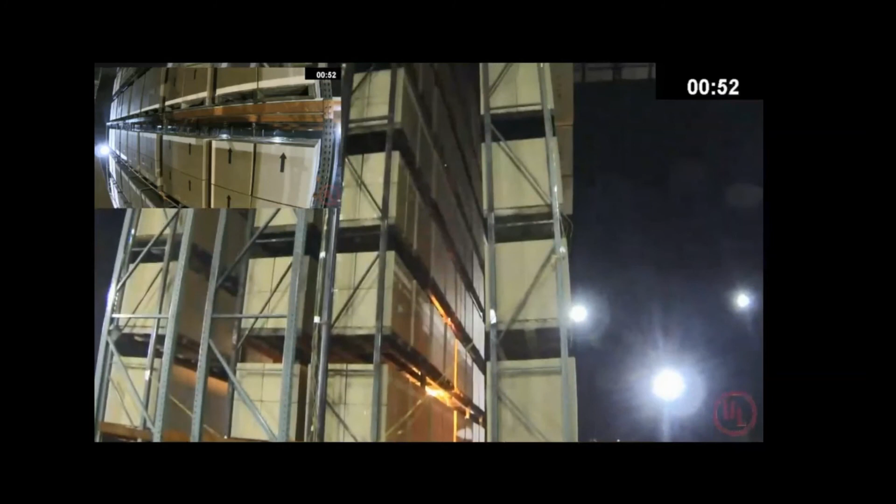A little bit further in, you'll start seeing some embers, I call them fireflies, kind of floating out from the underside of the barrier as well. The fire's continuing to grow. You'll see a few more embers, some more smoke, and then around the 1-minute mark we're going to see the fire actually hit the underside of the barrier and turn sideways.

And again, at the 1:14, 1:15 mark, we're going to see the fire sprinklers operate.

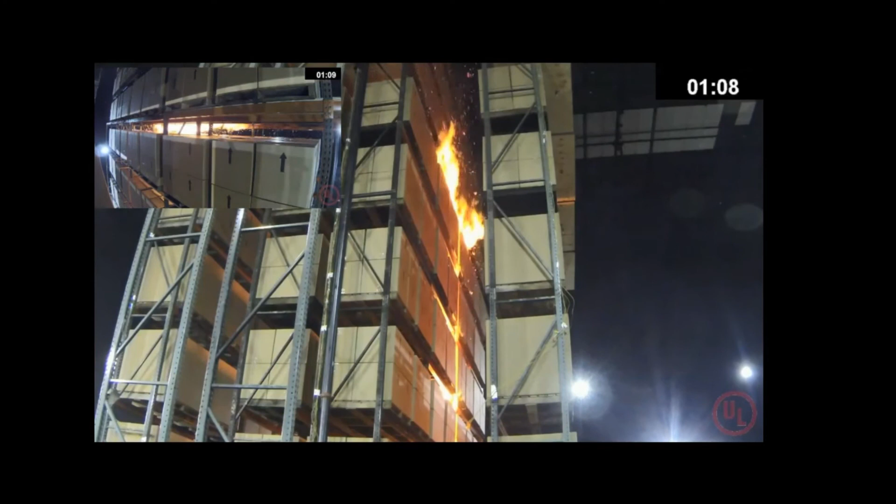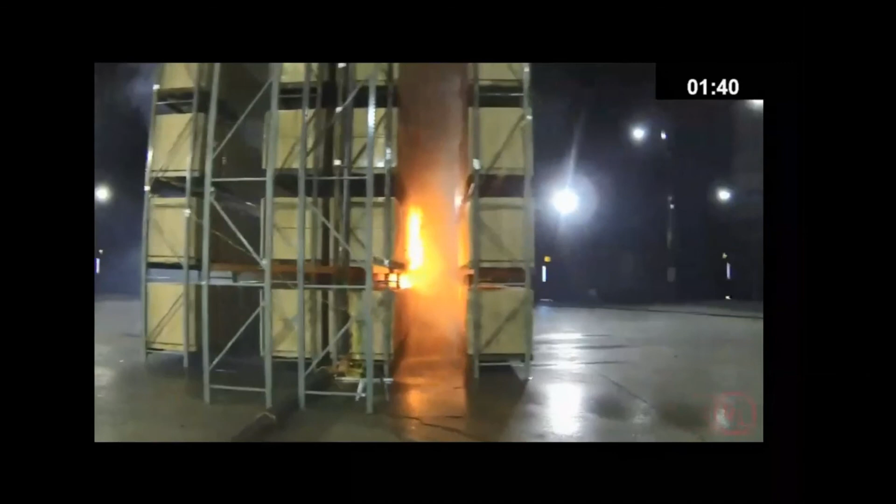And see the immediate effect it has on crushing that fire. The camera's going to move around a little bit here. If you take a look on the left side, on the right side, you can actually see the water is making it through the target array onto the floor. That's going to happen on each side, so very effective penetration of water onto the target arrays. We're pre-wetting all of those combustibles. Remember, pre-wetting is a very, very important part of fire control. Wet cardboard is extremely hard to ignite, so we like to get it wet.

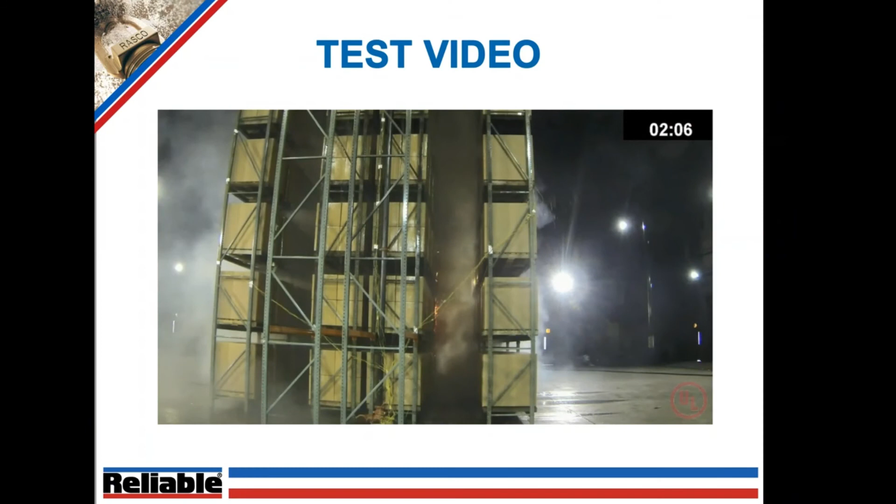And this test runs for another few seconds here. In the real world, they would let this go for 30 minutes if necessary to make sure that fire stayed under control. But again, extremely, extremely successful test, which then prompted us to do more.

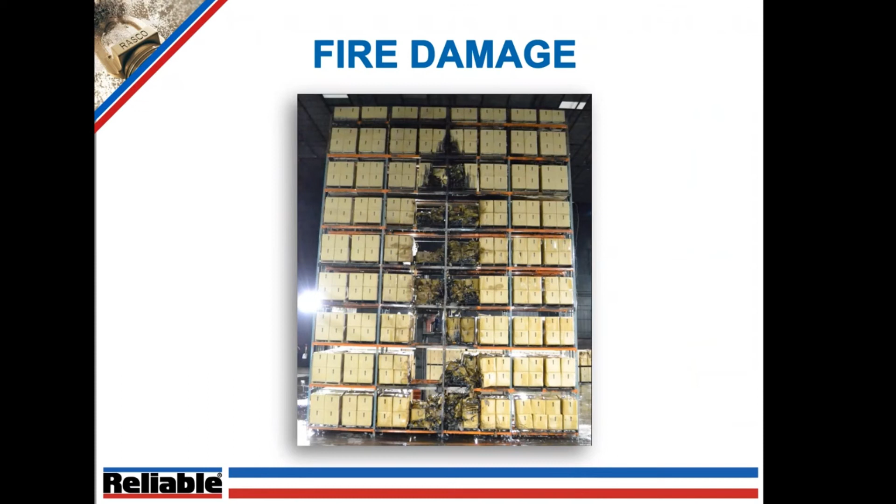Here's what the fire damage actually looked like from that test. And so imagine this with the vertical barriers. You'd have kind of the same end result, so to speak, although the fire damage for the vertical barriers was a little bit more because that fire again had to burn clear up to the roof. A very classical burn pattern where the pyramid kind of starts - the base of that pyramid at the top is where the horizontal barrier is at.

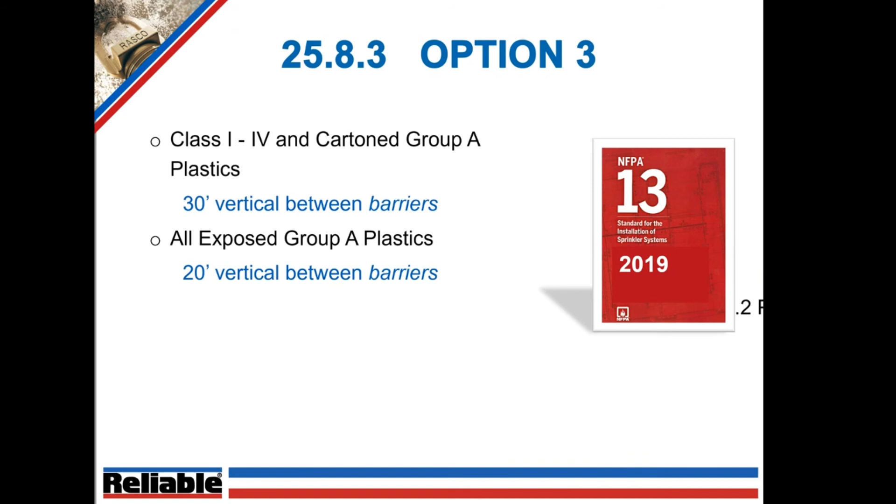K25.2 pendant EC sprinklers, intermediate temperature. Sprinkler deflector as close as possible to the underside of the barrier, and a limitation of a minimum of 6 inches between the top of storage and the deflector. And again, remember, we need that space to be able to get that water out of the top of the array and over into the aisles.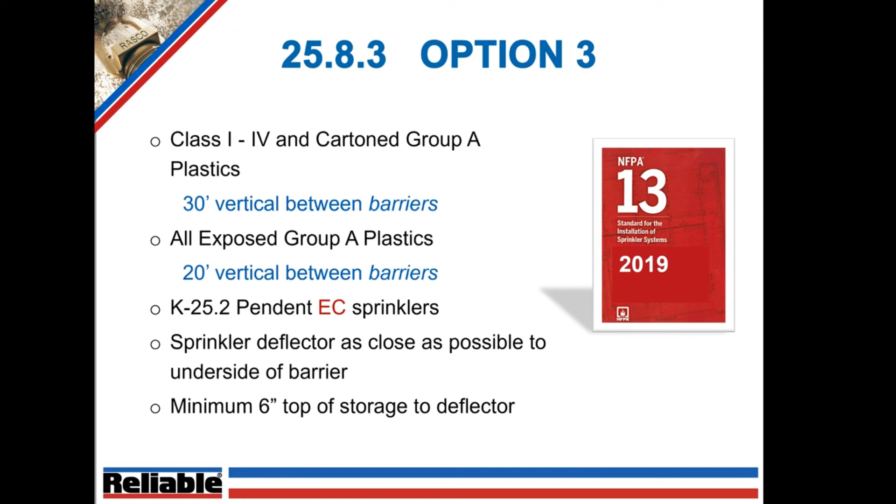Here's what the installation will look like. The single row rack, as opposed to being at every pallet position, is going to be at the transverse flue space, every other pallet position, not at the rack uprights. That would have been the conventional way of doing this years ago, to have the sprinkler hidden between the rack upright. In this case, we're going to shift them 1 pallet position and put them between the rack uprights at a maximum of 10 feet.

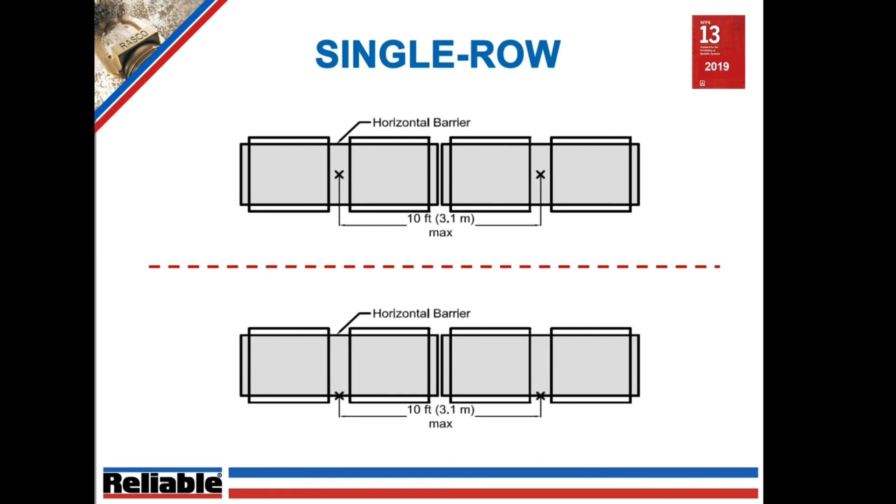For single row, they can be centered or pulled back to one edge or the other. The double row rack is where the beauty really starts to occur in terms of number of fire sprinklers. Again, nothing more than the same way we treated a single row rack. We're going to pull that line of sprinklers to the longitudinal flue, with fire sprinklers spaced at a maximum of 10 feet on center down the longitudinal flue.

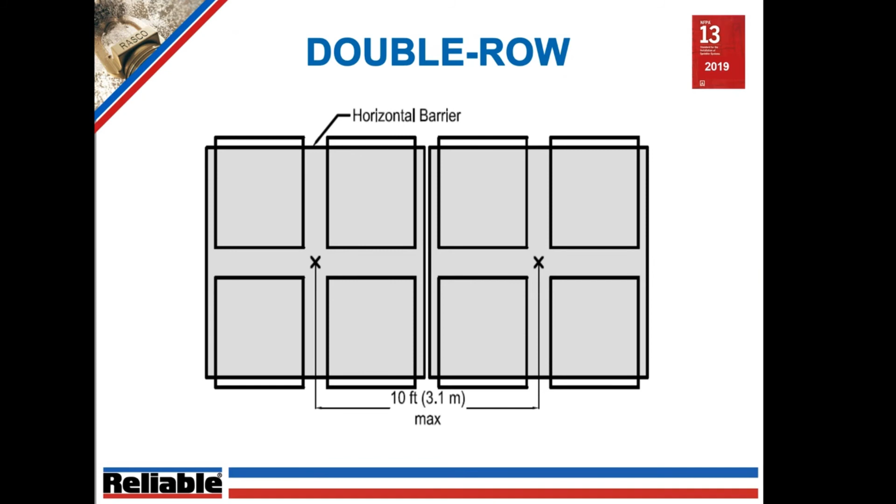Again, with the multiple row racks, we're now going to go into the longitudinal flue space at a maximum of 10 feet, and then face sprinklers 10 feet as well. And then there's going to be a stagger there, as you can see, and a maximum of 15.5 feet depth of the multiple row racks.

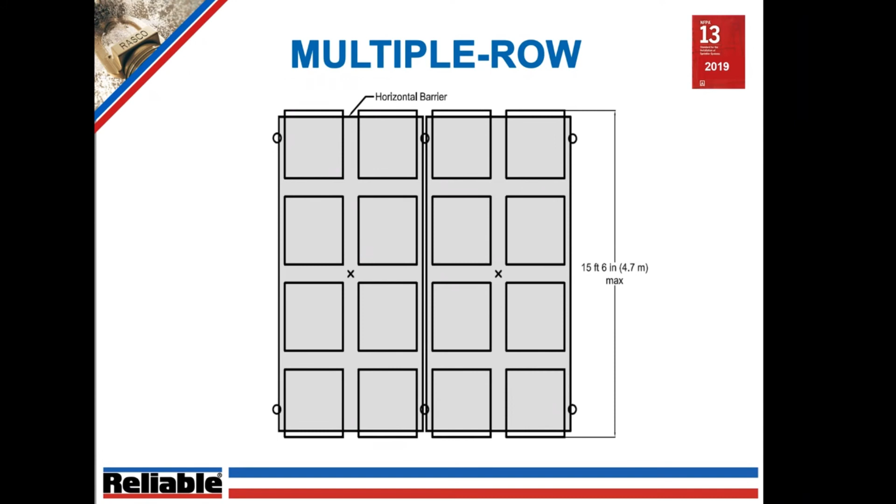Water flow demand: these are going to be flowing at 30 psi, which equates to 138 gallons per minute. Single and double row, we're going to do 4 sprinklers; multiple row, we're going to do 8 sprinklers. You can see the overall water demand for both of those systems without overflow. Those numbers will go up just a little bit, of course. And then the pressure, again, for the 25.2 option, 30 psi. So let's keep those numbers in mind as well.

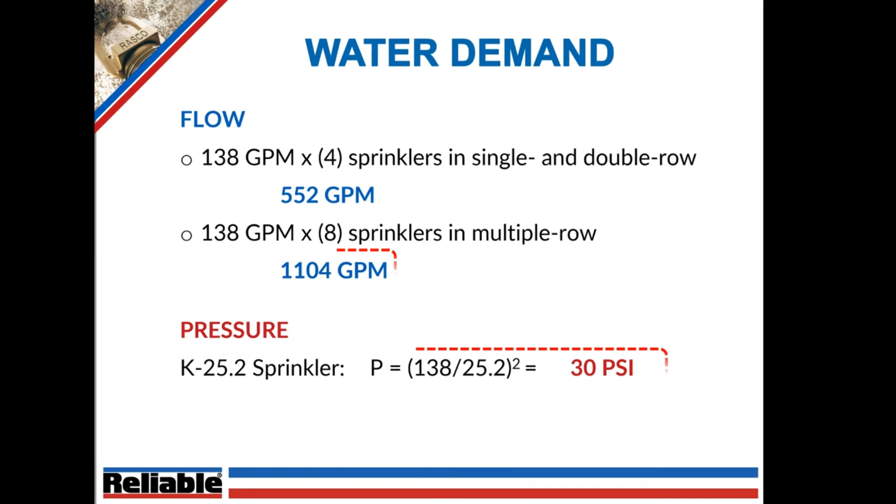So what have we done here now? We've looked at 3 options that cover the same type of commodity using their particular attributes: either horizontal barriers and 12-foot spacing, ESFRs at 30 or 40 feet, and then K25 ECs at either 20 or 30 feet. And we're going to build a comparison based on a project, a real-life project. The project is going to look like this:

150,000 square foot floor area, 120 feet tall. Why do we pick 120 feet tall? We pick 120 because that is the number that 12 feet, 30 feet, and 40 feet all go into equally, so it allows us to actually build that comparison.

What I did was take the drawings that I had, lay out the fire sprinklers for all three of these options, count them up, and now we can kind of see exactly what this comparison looks like. So for a multiple row option, we'll rip the Band-Aids off here. Option number 1: 29-pound end head pressure, 54,000 fire sprinklers in 18 million cubic feet.

I think, at least from my standpoint, when you start talking about buildings that are very tall, that have vertical layers of fire sprinklers, square feet makes no sense anymore. Historically, fire sprinklers, everything is in terms of square feet—square feet per sprinkler, hours per square feet, dollars per square feet, et cetera. That metric can no longer apply when you're into multiple vertical layers of piping.

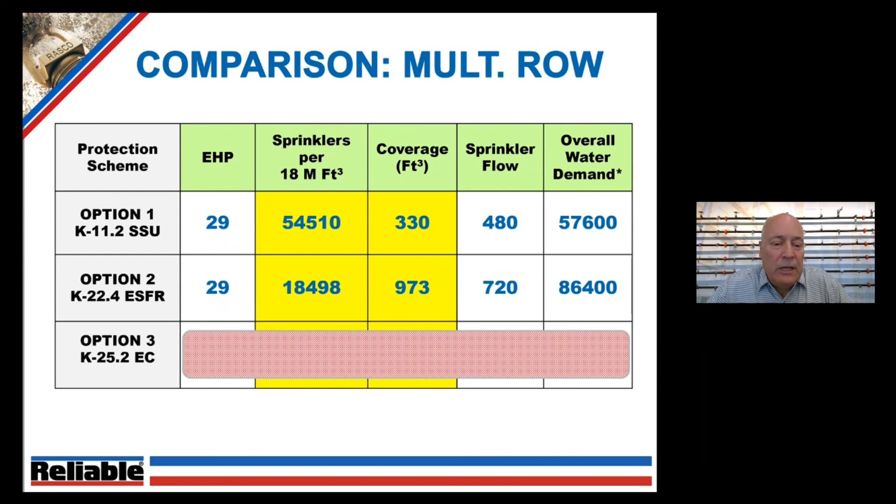Option number 3, the in-rack EC with 25.2 K-factor EC pendants, 30 PSI. Again, roughly half the number of sprinklers as option number 2, double the coverage area. However, because of the test parameters and the flow required, an escalated 1,104 gallons per minute. So the number on the far right—think about that in terms of potential water storage multiplied times your duration—and you can see how those would impact a water storage tank.

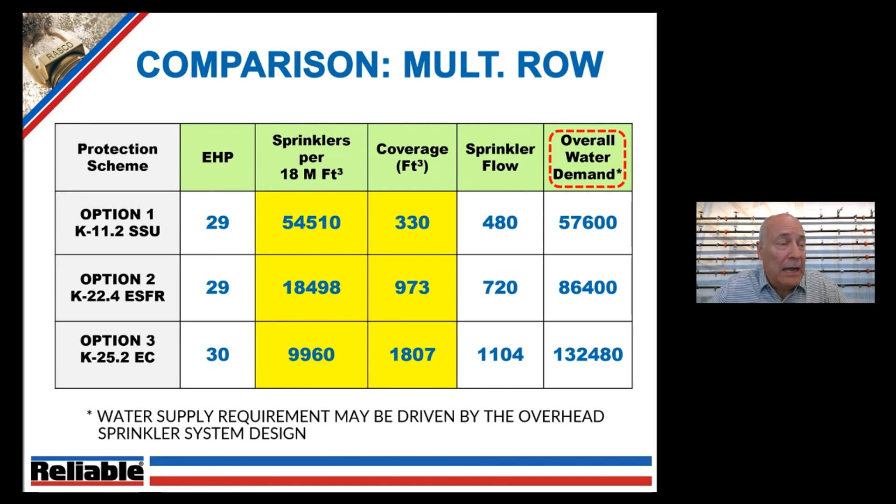So multiple row is one thing. Remember, our overall water demand may be driven by the roof system, and we'll talk about what that roof system needs to look like in a little bit, but we need to be looking at which one, either one or the other, is going to drive the size of fire pumps and storage tanks and things like that. Because why? We don't have to add this rack system with the overhead sprinkler demand.

Let's now take a comparison and look at double row racks. Option number 1, not a lot of change there: 317 cubic feet per sprinkler, 58,000 gallons. Nothing much changed there. Things change a little bit with the ESFR system.

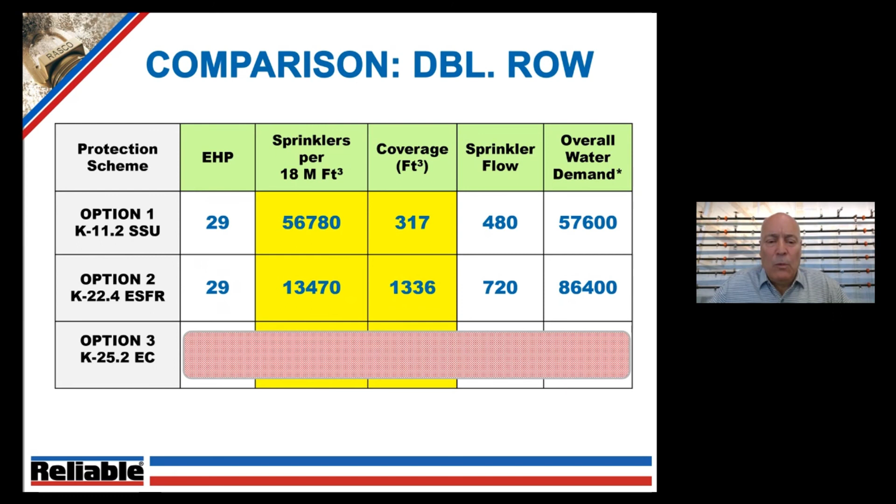The number of fire sprinklers goes down, coverage area goes up, and sprinkler flow essentially stays the same. But this is again where the beauty of the in-rack EC is, with the single and double row options. Let's see what those numbers look like: 30 PSI, very comparable to the 29 for the other two options. Fire sprinklers now very, very limited in number, less than 5,000. Coverage area jumps way up. Sprinkler water flow a little bit higher than option number 1, but not excessively.

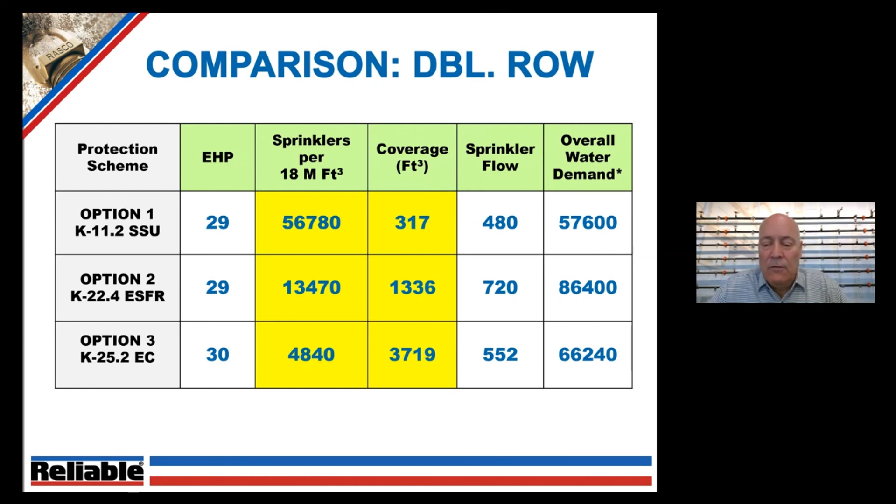So in the double and single row world, that in-rack EC K25.2 option is very, very attractive. Remember, we do need the horizontal barrier to go along with that as well.

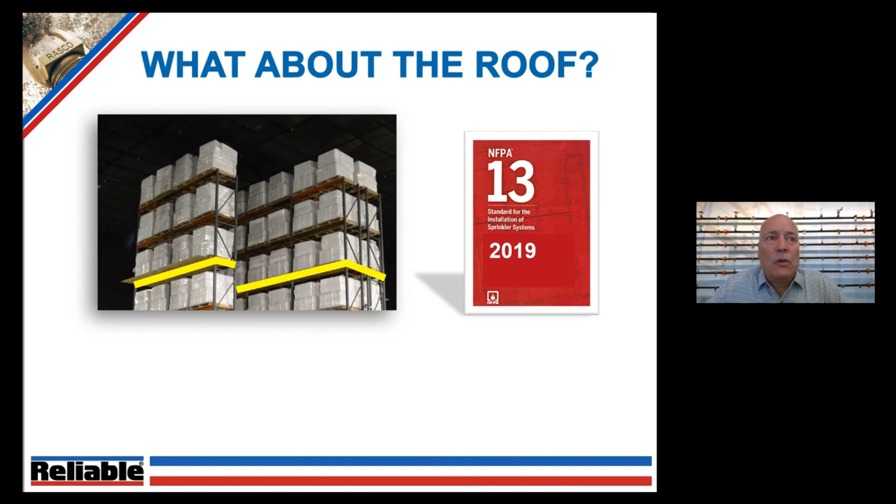So what about the roof? What do we do with the roof protection? The language in NFPA 13 is very clear. It also drives home the point of the virtual floor concept. The ceiling level sprinkler system is designed based on the highest commodity hazard that is not protected by the in-rack sprinkler system outlined in 25.8.1, 8.2, or 8.3. So we simply go to the top level of protection as we work our way vertically through the racks, and we look at what's left.

So in the case of the picture on the screen, if those are 5-foot pallet heights, we have about 15 feet of exposed expanded plastics. We would then look at the distance between the virtual floor and the roof, and we would protect that with possibly an NRAC EC, an extended coverage scheme, or perhaps an ESFR scheme up at the roof.

One of the other beauties of this system, if this is a retrofit or a repurposing of a building, or commodity creep has come into play, we can take that virtual floor and manipulate it at the top level to make the roof system applicable. In fact, you could cover and cap off the storage if you wanted to, and work with your AHJ on what exactly we're protecting at that point.

Maybe we pull the virtual floor to the bottom of the first pallet position. If it's 5 feet of cartoned or exposed expanded storage, we look into the miscellaneous section and pull out an extra hazard group 2 or something like that, whatever that is. But the reality again is we work from the top level of virtual floor and protect what's left. Very, very simple concept.

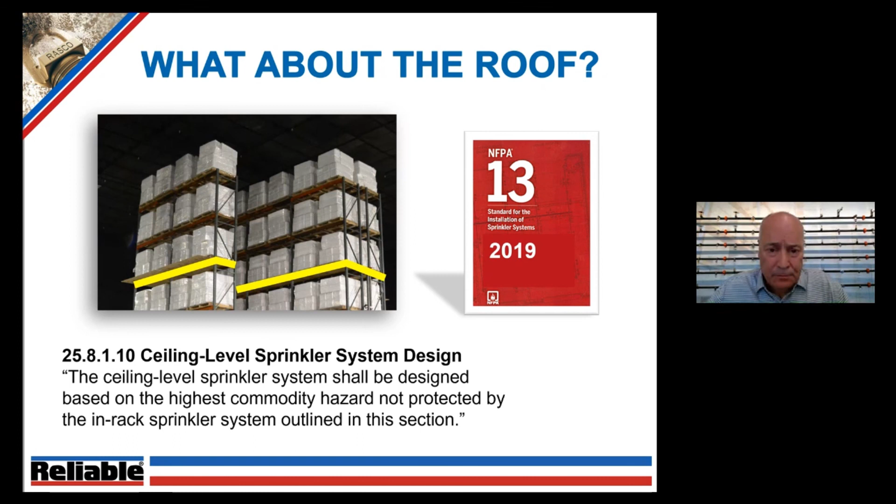Until we had options such as the virtual floor concept, the option would be very limited. Either you could not do what you wanted to do, or you would have been required to install a flat ceiling throughout this space, which, let's face it, is not a real feasible option for most developers, nor is it very feasible for storage occupancy.

So now with the options that we have, we theoretically could move the virtual floor to the top, cover the top load of commodity, and then essentially the existing roof system, whatever it is, if there is one, may be able to stay. And we protect everything below it using one of the options, either 1, 2, or 3.

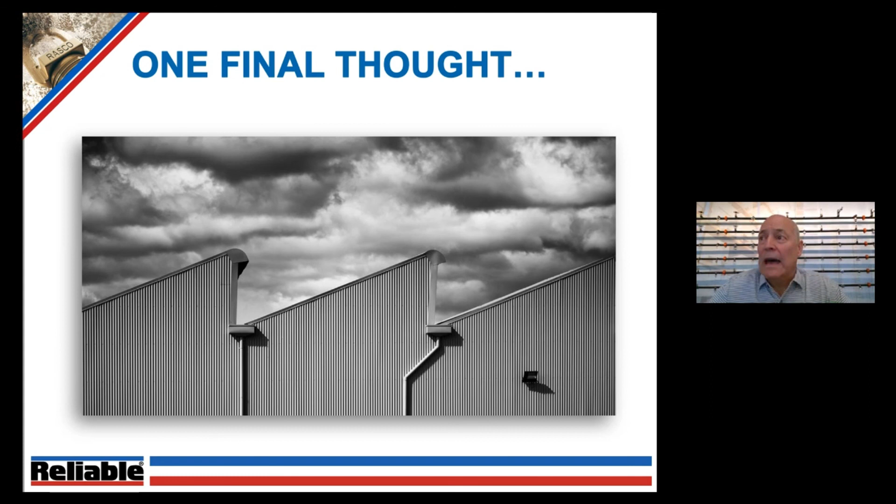So now we have a really good way to look at protecting sloped ceiling spaces, until such time as we have some better direction in the industry on how to do that.

So everybody, that is the presentation for today: in-rack options independent of the ceiling system.